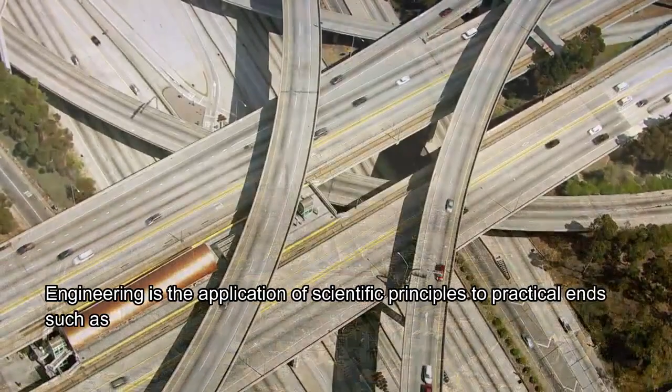Engineering is the application of scientific principles to practical ends such as design, manufacture, and operation of efficient and economical structures, machines, processes, and systems.

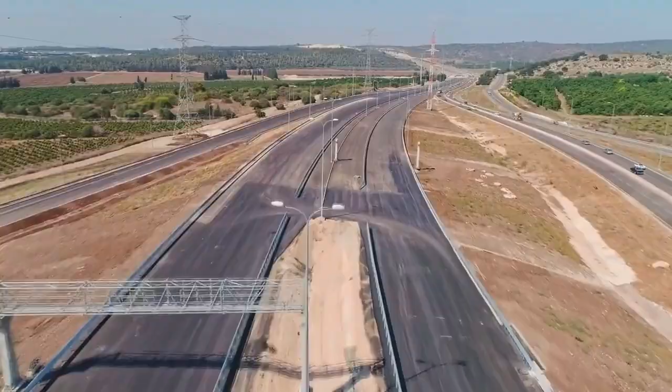Transportation engineering is defined as the application of technology and engineering principles to the planning, functional design, operations, and management of facilities for any mode of transportation in order to provide for the safe, rapid, comfortable, convenient, economical, and environmentally compatible movement of people and goods.

Society requires transport as a basic need. Everyone has traveled, whether for business or pleasure, transporting commodities to a factory or finished products for consumption. These basic human needs are satisfied by transportation. The development of human civilization depends heavily on transportation.

Transportation systems analysis. Analysis of transportation systems is now a legitimate profession. Around the world, more and more governmental organizations, academic institutions, researchers, professionals, and private sector groups are adopting a multimodal orientation that is truly multimodal in nature and a systematic approach to transportation issues.

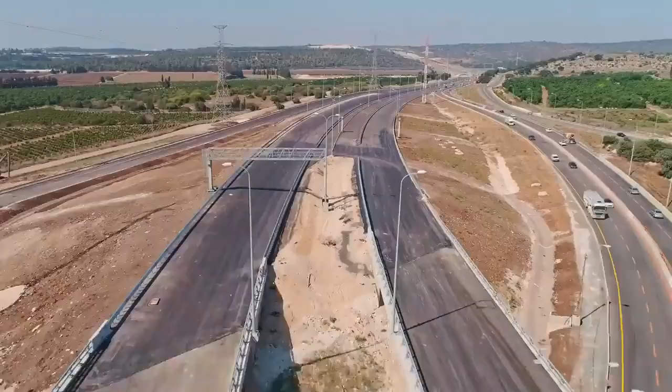There are 5 diverse characteristics of transportation systems. First is multimodal, covering all modes of transport—air, land, and sea—for both passenger and freight.

Next is multi-sector, which encompasses the problems and viewpoints of government, private industry, and the public.

Next is multi-problem, which ranges across a spectrum of issues including national and international policy, planning of regional systems, the location and design of specific facilities, carrier management issues, and regulatory, institutional, and financial policies.

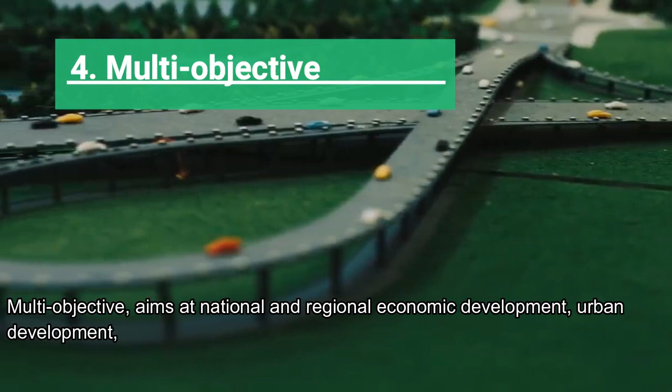Multi-objective aims at national and regional economic development, urban development, environmental quality, and social quality, as well as service to users and financial and economic viability.

Multidisciplinary draws on the theories and methods of engineering, economics, operations research, political science, psychology, other natural and social sciences, management, and law.

The goal of transportation systems analysis: in spite of the diversity of problem types, institutional context, and technical perspectives, there is an underlying unity—a body of theory and a set of basic principles to be utilized in every analysis of transportation systems.

The core of this is the transportation system analysis approach. The focus is on the interaction between the transportation and activity systems of the region. This approach is to intervene delicately and deliberately in the complex fabric of society, using transport effectively in coordination with other public and private actions to achieve the goals of that society.

The role of transportation systems analysis: the methodological challenge is to conduct a systematic analysis in a particular situation which is valid, practical, and relevant, and which assists in clarifying the issues to debate.

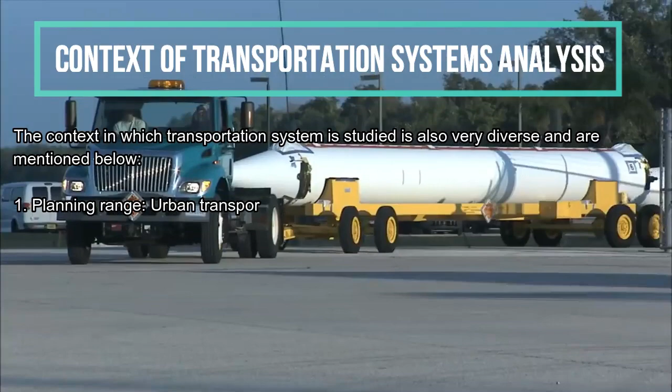The context of transportation system analysis: the context in which transportation systems are studied is also very diverse, and these are mentioned below.

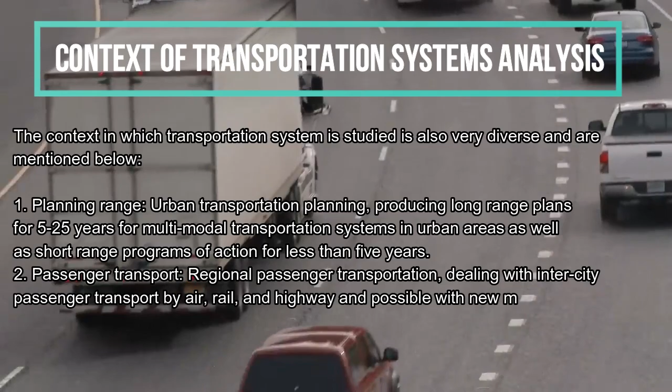Number 1, planning range: urban transportation planning, producing long-range plans for 5 to 25 years for multimodal transportation systems in urban areas, as well as short-range programs of action for less than 5 years.

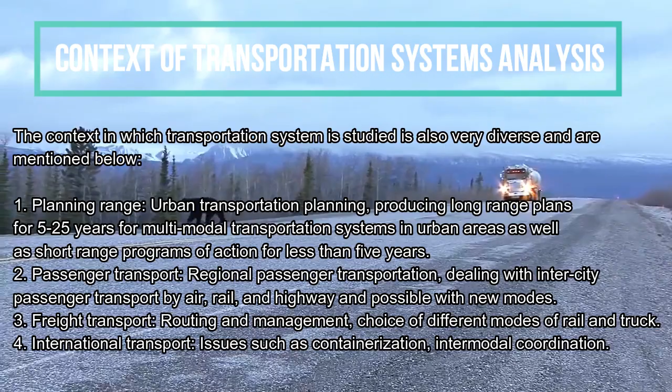Number 2, passenger transport: regional passenger transportation, dealing with intercity passenger transport by air, rail, and highway, and possibly with new modes.

Number 3, freight transport: routing and management, choice of different modes of rail and truck.

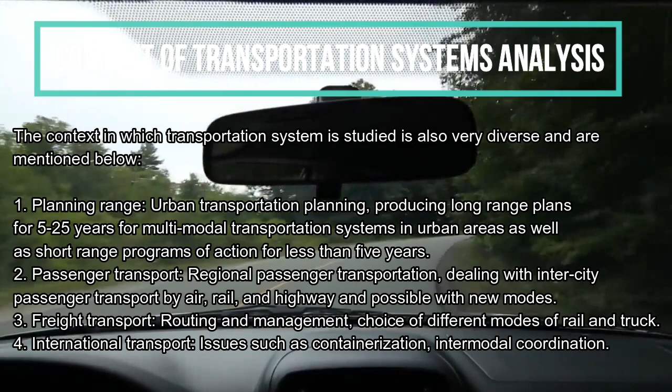Number 4, international transport: issues such as containerization and intermodal coordination.

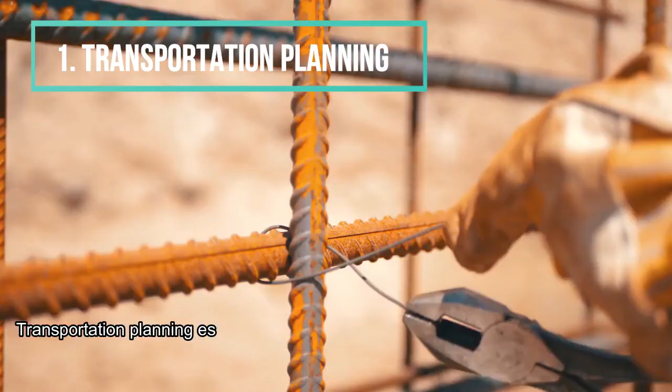The four major disciplines of transportation. Transportation planning essentially involves the development of a transport model which will accurately represent both the current as well as the future transportation system.

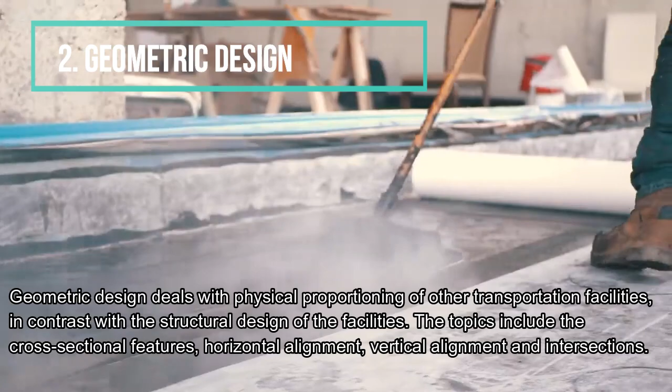Geometric design deals with the physical proportioning of the transportation facilities, in contrast with the structural design of the facilities. The topics include cross-sectional features, horizontal alignment, vertical alignment, and intersections.

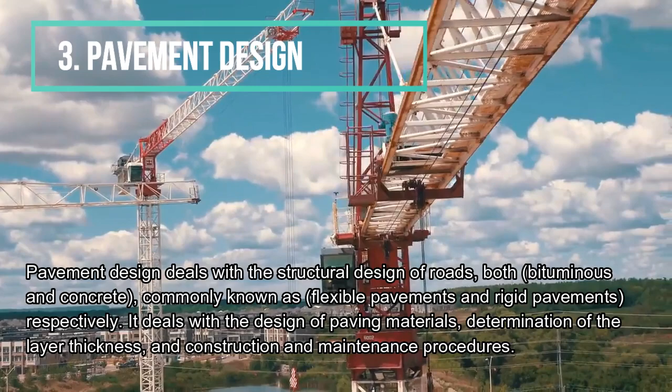Pavement design deals with the structural design of roads, both bituminous and concrete, commonly known as flexible pavements and rigid pavements respectively. It deals with the design of paving materials, determination of layer thickness, and construction and maintenance procedures.

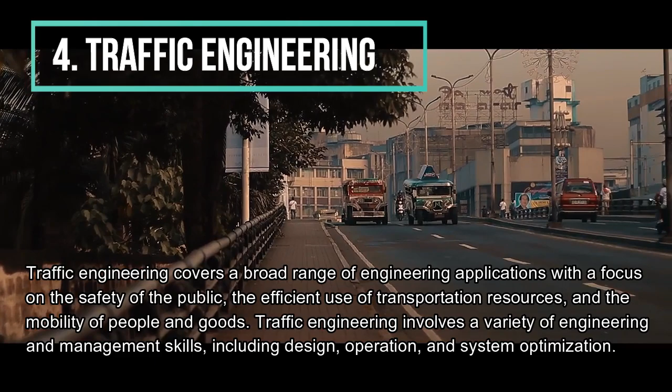Traffic engineering covers a broad range of engineering applications with a focus on the safety of the public, the efficient use of transportation resources, and the mobility of people and goods. Traffic engineering involves a variety of engineering and management skills, including design, operation, and system optimization.

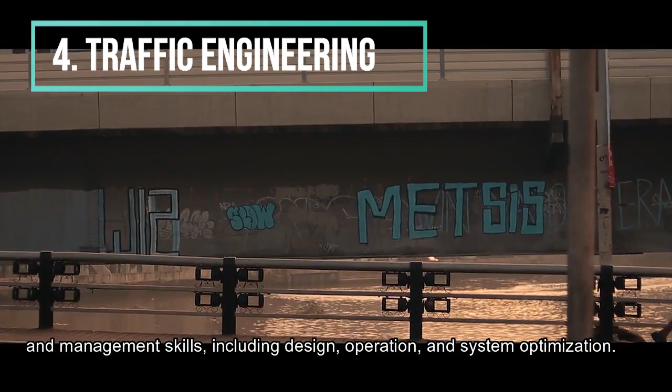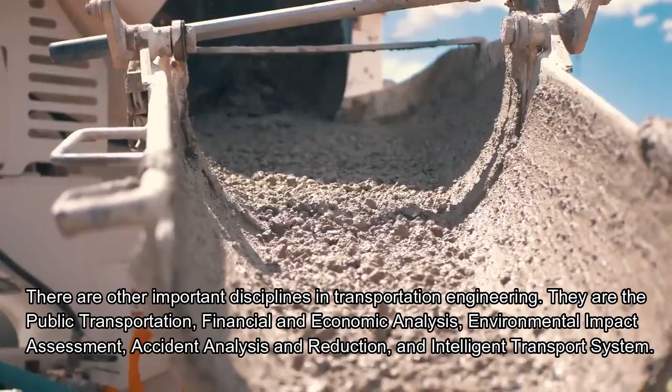There are other important disciplines in transportation engineering: public transport, financial and economic analysis, environmental impact assessment, accident analysis and reduction, and intelligent transport systems.

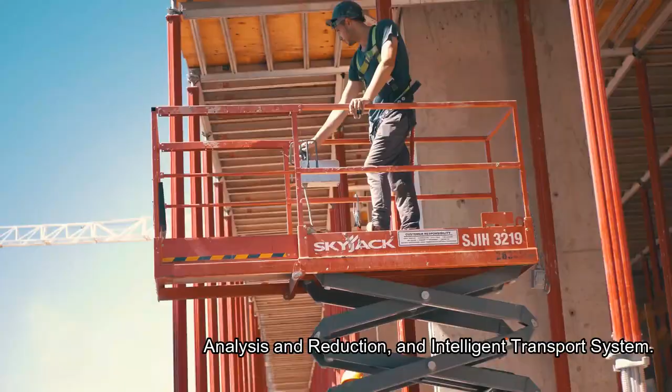Let's proceed to the transport planning process. Transportation planning is the process of looking at the current state of transportation in the region, designing for future transportation needs, and combining all of that with elements of budget, goals, and policies. It helps shape how a community or city grows by evaluating everything from streets and highways to cargo ships to public transit and bike lanes. It can influence everything from business to recreation to quality of life.

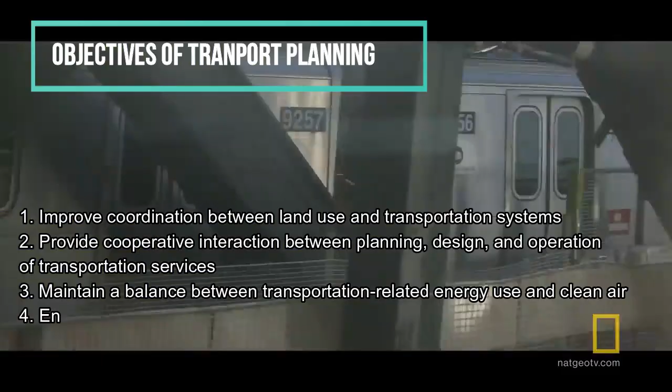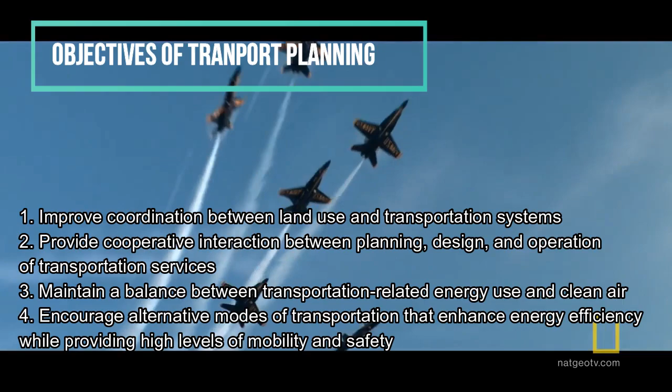Objectives of transport planning. Number 1, improve coordination between land use and transportation systems. Number 2, provide cooperative interaction between planning, design, and operation of transportation services. Number 3, maintain a balance between transportation-related energy use and clean air.

Number 4, encourage alternative modes of transportation that enhance energy efficiency while providing high levels of mobility and safety.

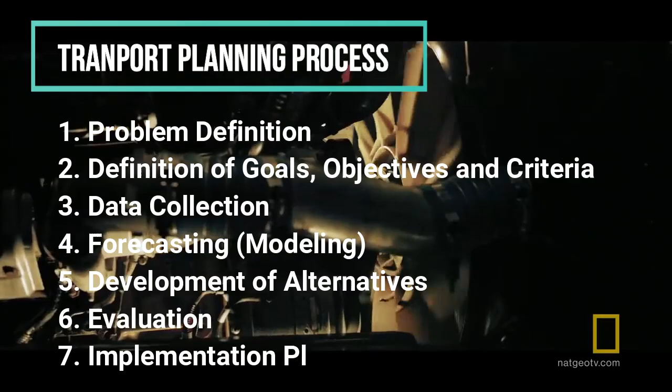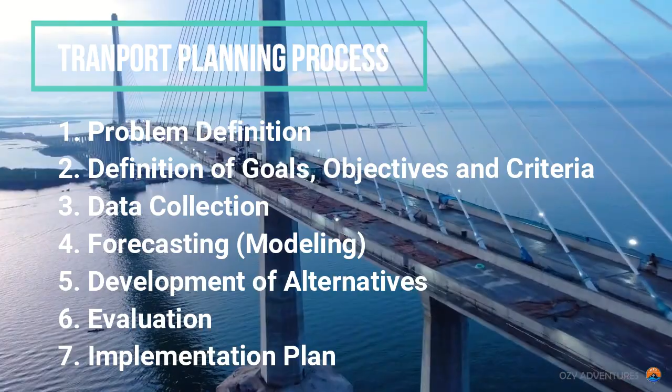Overall, there are 7 transport planning processes: Number 1, problem definition. Number 2, definition of goals, objectives, and criteria. Number 3, data collection. Number 4, forecasting or modeling. Number 5, development of alternatives. Number 6, evaluation. Number 7, implementation of the plan.

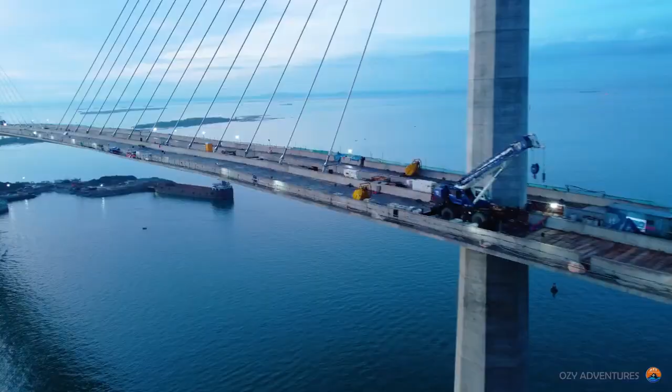Time frame of planning. Short term: improvement or optimization of current operations and existing infrastructure and resources, implemented within 2 to 3 years.

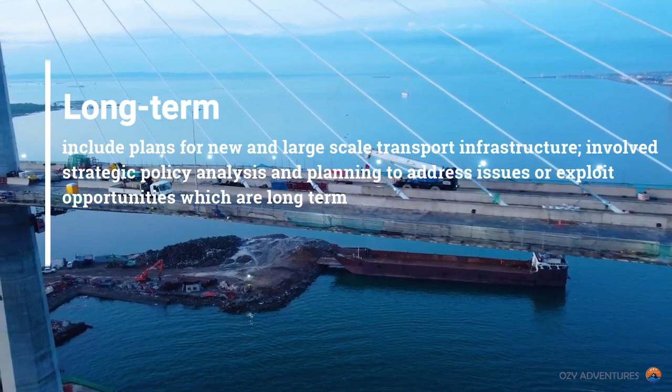Medium term involves significant investments, usually involving major improvements and capacity increases of the current infrastructure, within 3 to 7 years. Long term includes plans for new and large-scale transport infrastructure, involving strategic policy analysis and planning to address issues or exploit opportunities in the long term.

Geographic scale of planning. National planning: infrastructure provision for regional economic exchange, person trips for business, social and recreational purposes. It covers all modes and intermodal systems.

Regional planning: interurban and urban-rural movements of persons and goods, longer but less frequent trips compared to the urban level. Urban level: daily commuting trips of individuals and vehicles carrying goods.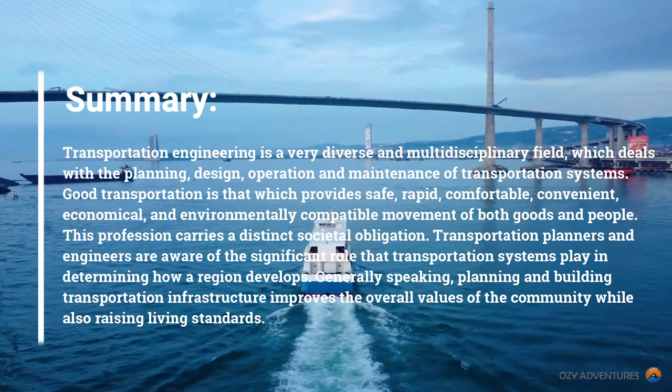To summarize, transportation engineering is a very diverse and multidisciplinary field which deals with the planning, design, operation, and maintenance of transportation systems. Good transportation is that which provides safe, rapid, comfortable, convenient, economical, and environmentally compatible movement of both goods and people. This profession carries a distinct societal obligation.

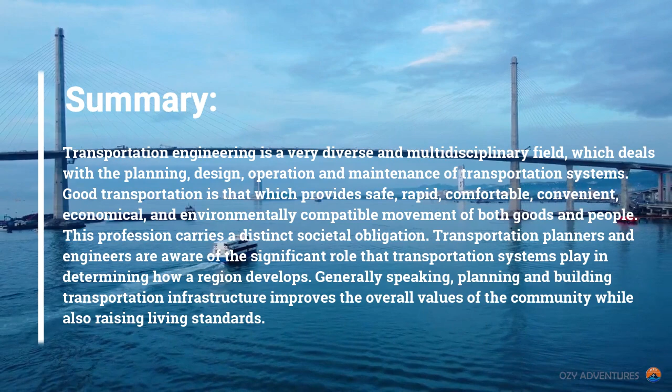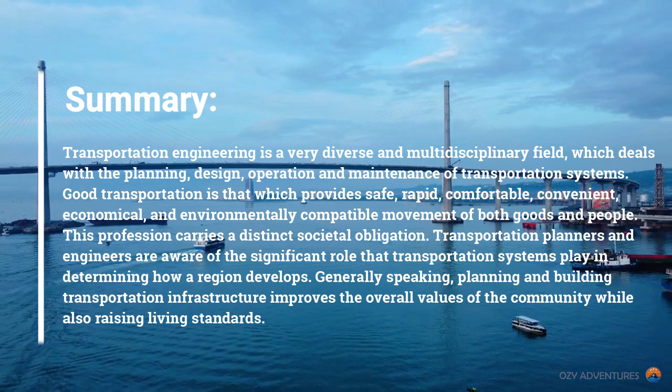Transportation planners and engineers are aware of the significant role that transportation systems play in determining how a region develops. Generally speaking, planning and building transportation infrastructure improves the overall values of the community while also raising living standards.